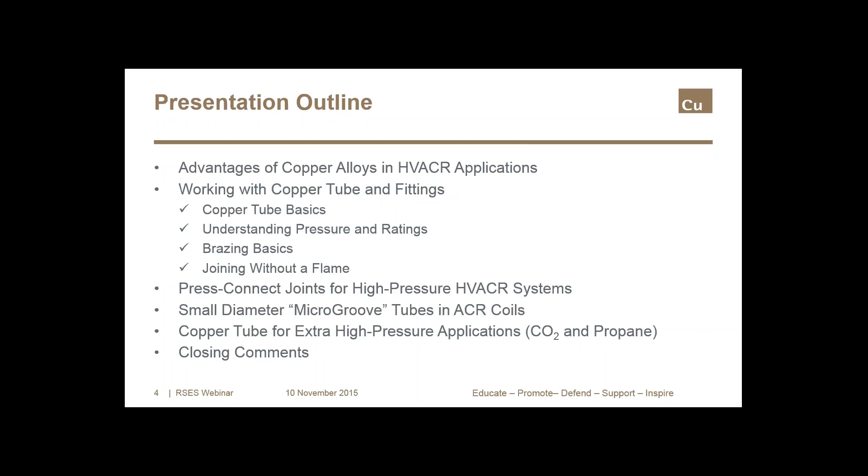Copper alloys have been used in heat transfer applications for well over 100 years, and the reasons behind that long and successful history are things that field service engineers see firsthand all the time. Even in the highly competitive world we live in today, copper still represents a very economical solution because it's so easy to work with.

Because it can be formed and joined in a short period of time, installations are fast, efficient, and effective. Copper components are reliable and callbacks are rare. In the field, the excellent workability of copper products allows for fast, strong, leak-free joints. In areas where the use of a flame is prohibited, there are effective joining methods that do not require a torch. And in stark contrast to other materials, copper components can be repaired in the field easily.

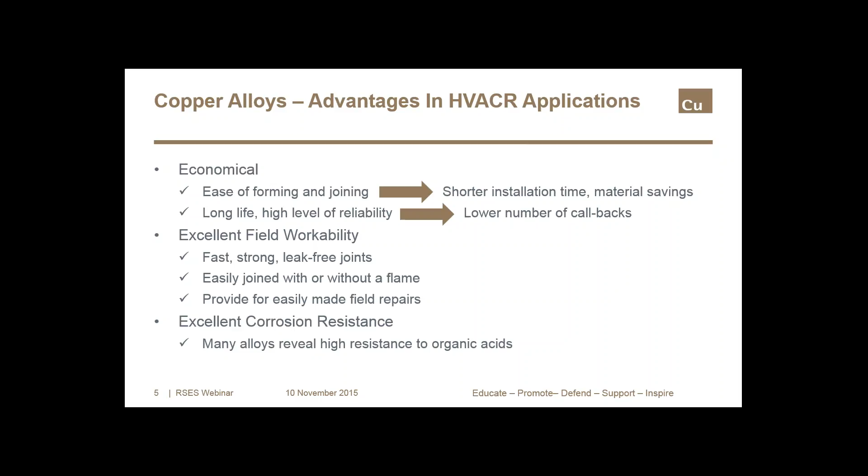Copper alloys are inherently resistant to corrosion. Certain alloys are resistant to the presence of organic acids, and copper tubes made from these alloys are specifically being marketed for air conditioning and refrigeration applications, such as evaporator coils.

The thermal conductivity of copper is more than 60% higher than aluminum and about 30 times that of stainless steel. Copper alloys are also quite strong. Because of this high strength, copper tubes are able to handle high pressures with relatively thin walls compared to other materials. We'll talk more about new refrigerants and higher operating pressures, but the strength of copper alloys is one of the qualities proving to be important to a future of more environmentally friendly refrigerants.

Because copper tube can be formed to follow the contour of structures and corners, the number of joints and elbows can be minimized, and that results in a savings of material and time.

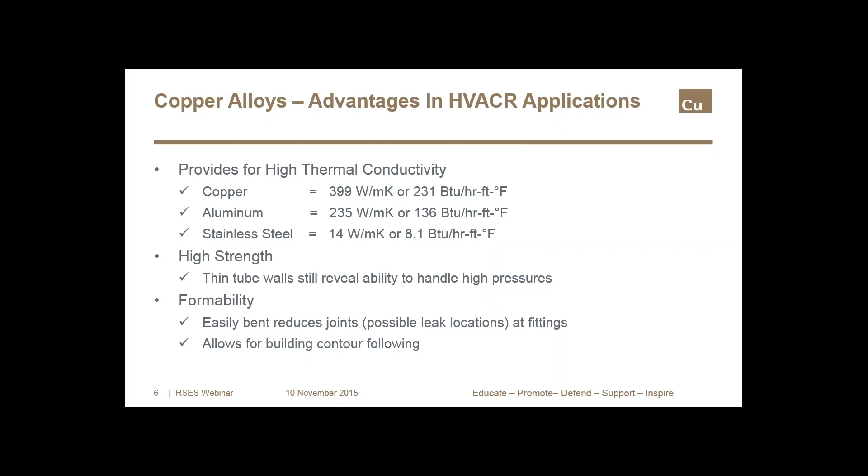Copper is safe. It does not burn, and it will not carry fire through walls, floors, and ceilings. There are no volatile compounds needed for installation. It doesn't degrade into toxic compounds, and there are effective joining methods that do not require a flame, even for high-pressure applications.

Copper tube and fittings are manufactured to well-defined standards and marked with permanent identification, so you know exactly what it is and who made it. It's accepted by virtually every major mechanical code.

Finally, no copper used in a building today should ever end up in a landfill. Copper stands alone as an engineering material that can be recycled over and over without degrading its content or properties. So once again, there are good reasons why copper has been used in heat transfer for over 100 years.

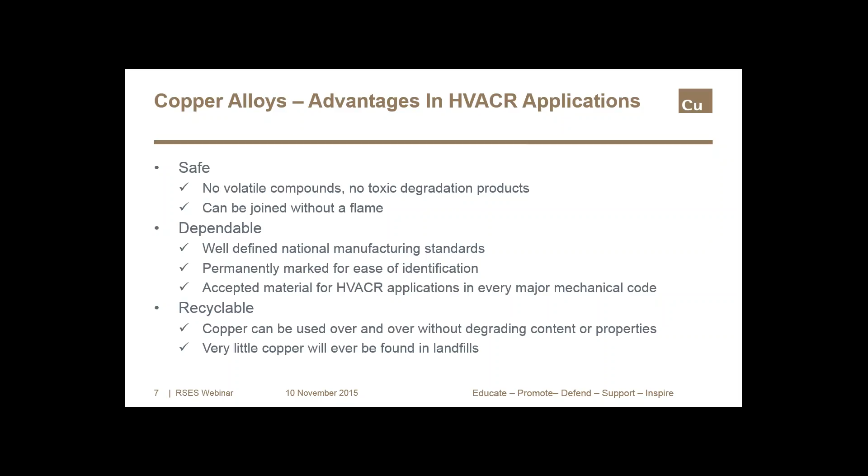Copper tube and fittings for air conditioning and refrigeration applications are made from nearly pure copper. It's an alloy we refer to as C122, and it has over 99.9% copper with very small amounts of phosphorus.

Copper tube is available in coils or in straight lengths. If you're working with a coil, it's annealed or soft drawn. But if you're working with straight lengths, it could be annealed or drawn. A drawn tube means it was once at a larger diameter, and through a drawing process that involves a die, the final diameter was reached. This means the copper was cold worked, resulting in a harder material.

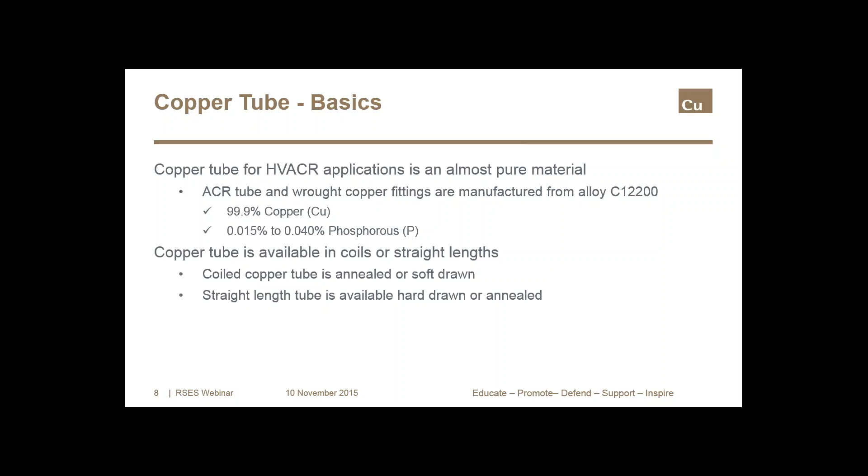Annealed tube means the material has undergone a heating process that resulted in a soft temper. This tube is more pliable and easy to form. Strength, formability, and other mechanical factors determine the type of copper tube that will be used in a particular application.

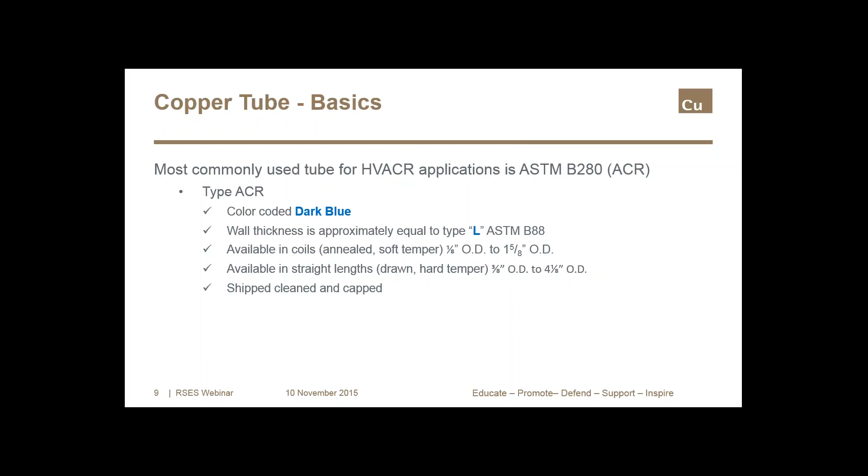For air conditioning and refrigeration, type ACR tube is most common. It meets ASTM specification B280. It is color-coded blue and has a wall thickness that's most like type L B88 tube. Coiled or annealed tube is available in diameters from 1/8 of an inch up to 1 5/8 inches OD. In straight lengths, drawn tube or hard temper is available in diameters from 3/8 all the way to 4 1/8 inches OD.

Copper tube can be plastic coated for what we call aggressive or corrosive environments. The tube can also be insulated or even pre-charged.

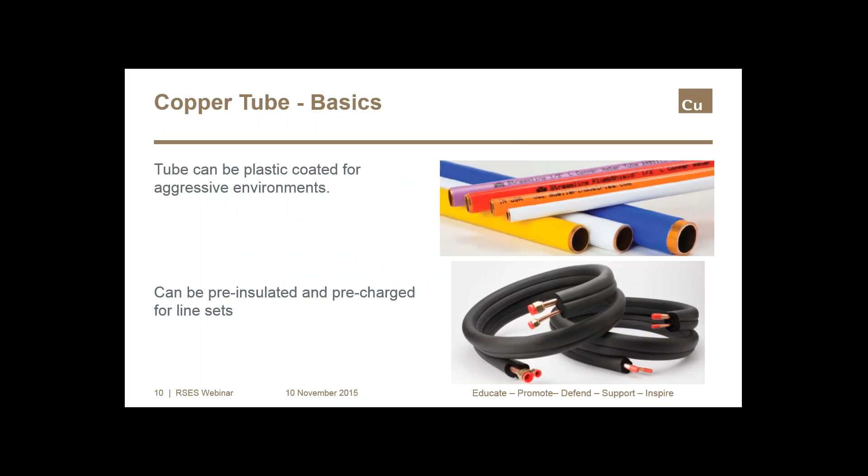An experienced technician that's been on the job for a while has no doubt noticed an evolution in refrigerants, and the trend with new refrigerants is higher operating pressures. About 25 years ago, government regulations became a factor in the design of air conditioning and refrigeration equipment when the Montreal Protocol took effect. The Montreal Protocol mandated a phase-out plan for CFCs, chlorofluorocarbon refrigerants. This covered refrigerants like R12 that are no longer used.

HCFC refrigerants, or hydrochlorofluorocarbons, were allowed as transitional replacements until HFC refrigerants were fully implemented. HFC stands for hydrofluorocarbon, and this family of refrigerants does not have chlorine, which was the problem element linked to the depletion of the ozone layer. So R22 was a transitional HCFC refrigerant, and today we see this being replaced by HFCs like 134A, 404A, 410A, and a whole host of others.

It's typical for HFC refrigerants to operate at higher pressures. Looking forward, we see a push for natural refrigerants such as R744, which is CO2, and R290, which is propane. And refrigerant systems that use CO2 have yet even higher operating pressures.

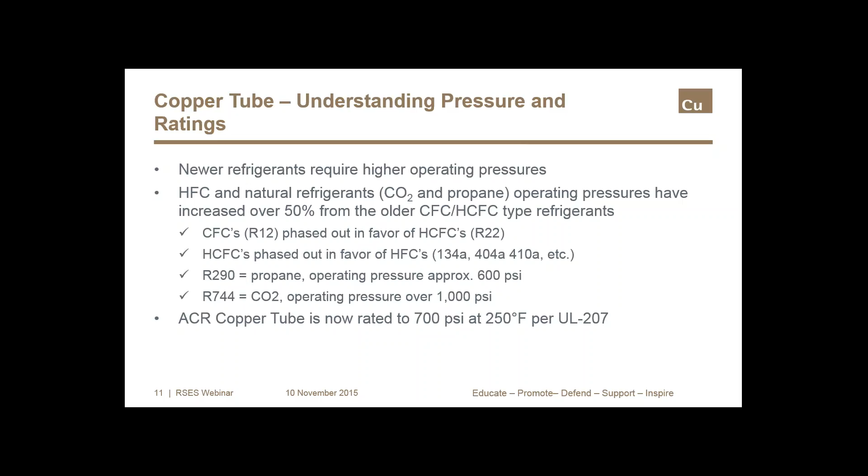Copper tubes and fittings are well suited for new refrigerants with higher operating pressures. ACR tube is rated to 700 psi at 250 degrees Fahrenheit, and this is certified by UL 207. But manufacturers are actively promoting new products for high pressures, and we'll talk a little bit later about copper tube for extra high pressure applications.

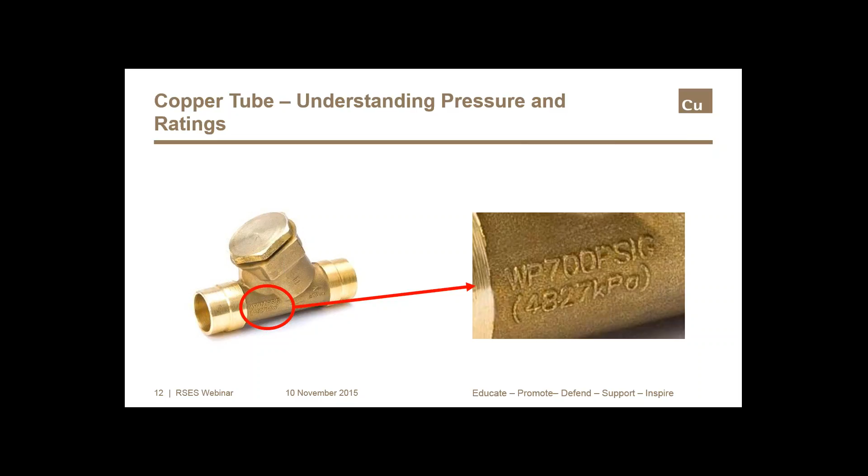When I spoke about the dependability of copper products, I mentioned that copper tube and fittings are manufactured to well-defined standards and marked with permanent identification, so you know exactly what it is and who made it. Here's an example: we can see that this fitting is manufactured for working pressures up to 700 psi. And here's another example of cast copper alloy pressure ratings and manufacturer's identification.

Wrought copper fittings look exactly like copper tube, and are preferred for air conditioning and refrigeration brazing. They're available over a wide range of sizes and types.

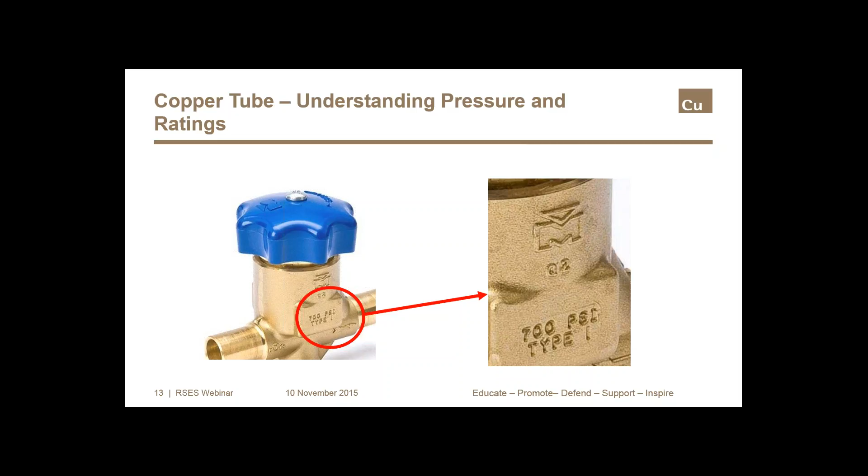The exceptional formability of copper gives us the ability to form it at the job site. When tube is bent correctly, it will not collapse on the outside of the bend, and it will not buckle on the inside of the bend either.

We've learned from burst testing that the strength of a bent copper tube can actually be greater than it was before bending. Both annealed tube and drawn tube can be bent with benders. The proper size bender must be used for each size tube.

First, with the handles at 180 degrees and the tube holding clip raised out of the way, the tube is inserted in the groove of the forming wheel. Next, the tube holding clip is moved over the tube and the handle is positioned at a right angle. This engages the forming shoe over the tube.

At this point, the zero mark on the forming wheel should be even with the front edge of the forming shoe. The bend is made by pulling the handles toward each other in a smooth, continuous motion. The calibrations on the forming wheel show the angle of the bend.

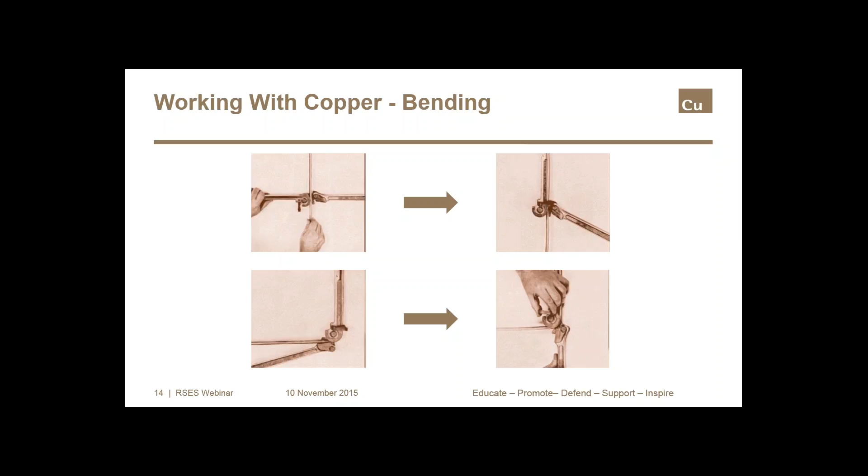We're going to turn our attention now to joining methods, and we're going to start with brazing. Brazing is most common in air conditioning and refrigeration applications, and that's for good reasons: it's a fast process, and it makes a strong, leak-free joint. Compared to solder, brazing is done at much higher temperatures.

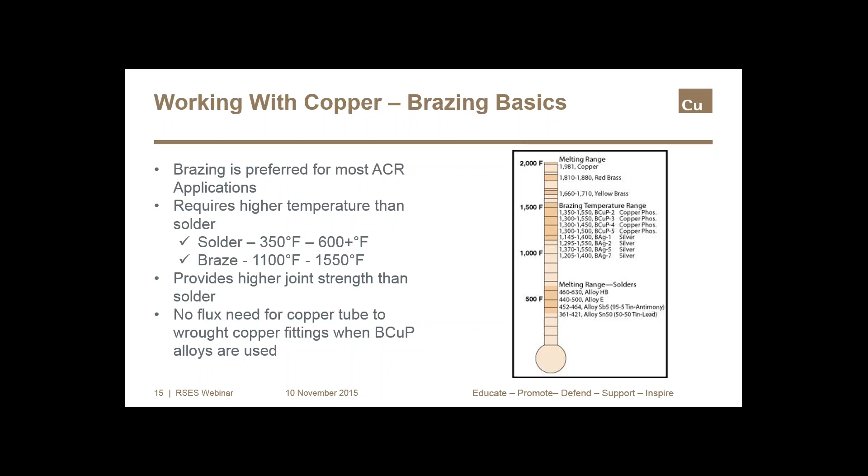Brazing requires filler metals and capillary fittings. When brazing copper tube to wrought copper fittings, it does not require flux because the phosphorus in the filler metal does that job. However, when other metals are brazed, fluxes are typically required, and it's critical that the correct flux is used.

Looking at filler metals, there are two basic types normally used in air conditioning and refrigeration applications: a brazing copper phosphorus, or BCuP series, and a brazing silver, or BAg series. The BCuP series is most commonly used for air conditioning and refrigeration installations, and these filler metals have higher melting temperatures than the silver-containing BAg series.

There's a BCuP-2 filler that's recommended for close tolerances. There's BCuP-3, 4, and 5 that are recommended for joints where close tolerances cannot be held. Looking at the composition of BCuP filler alloys, there's phosphorus in amounts that vary from about 4 to 7.5%. The phosphorus in this alloy acts as a fluxing agent.

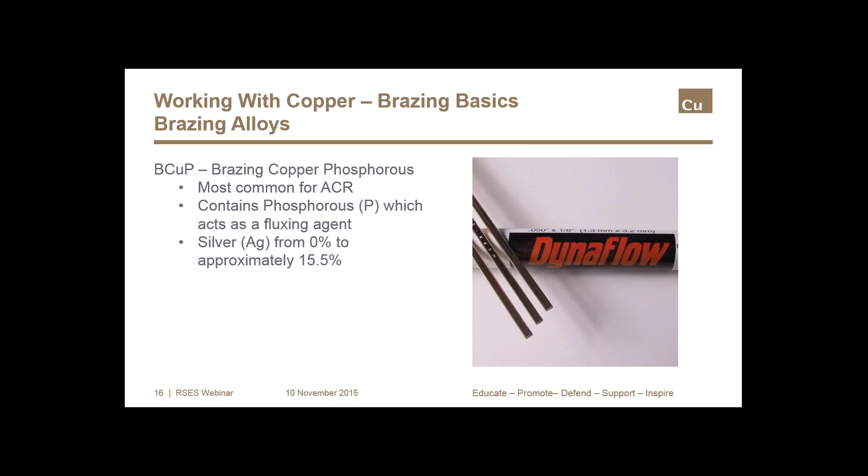So, when joining copper to copper using a BCuP brazed filler, there is no need for a separate fluxing operation.

The filler metals that contain silver, the BAg series, are used to join dissimilar metals. These brazed fillers can contain a considerable amount of silver, making them rather expensive in comparison to the BCuP fillers. Note that the BAg fillers do not contain phosphorus or any other metal that would act as a fluxing agent. Therefore, a separate fluxing operation is required when you're working with BAg brazed fillers.

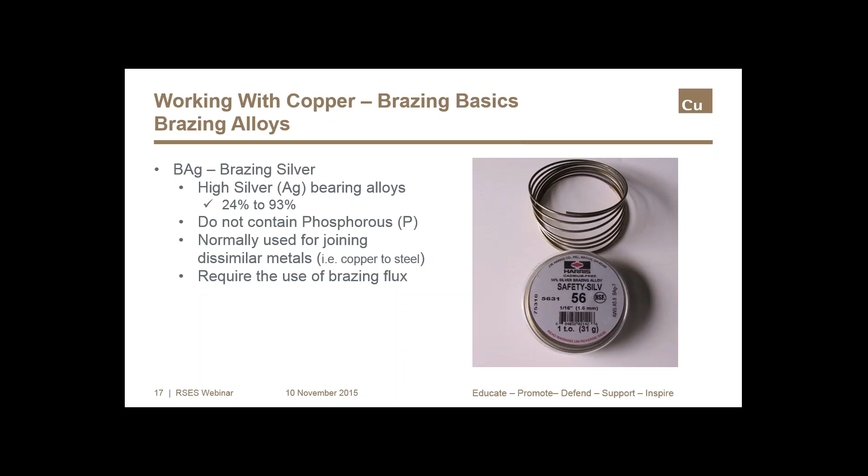The American Welding Society, or AWS, has developed what they call the 3T rule. It says that if the brazed alloy can penetrate the joint a distance of 3 times the thickness of the thinnest material, which is most often the tube, then the finished brazed joint will be stronger than the tube or the fitting. So the message from AWS is to shoot for deep penetration of the brazed alloy, and the technique used to heat the joint during brazing will be an important factor in achieving that penetration.

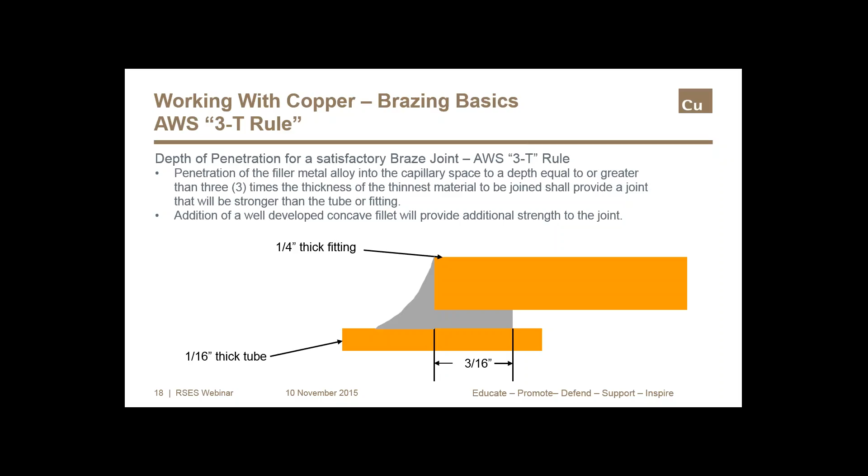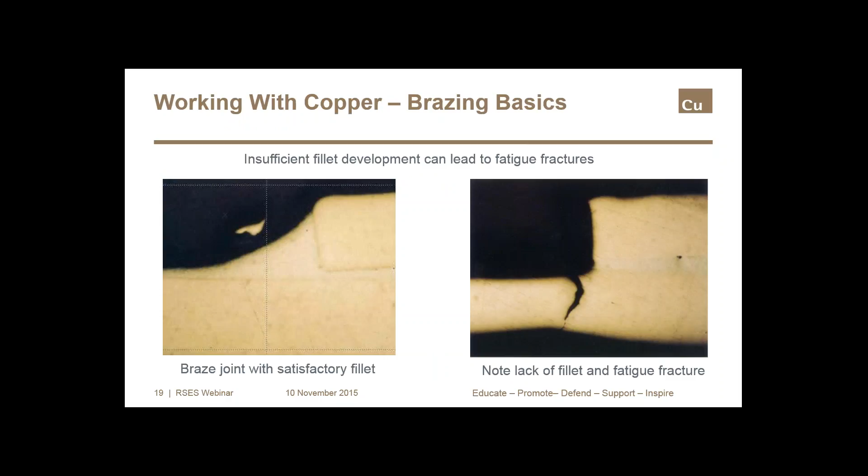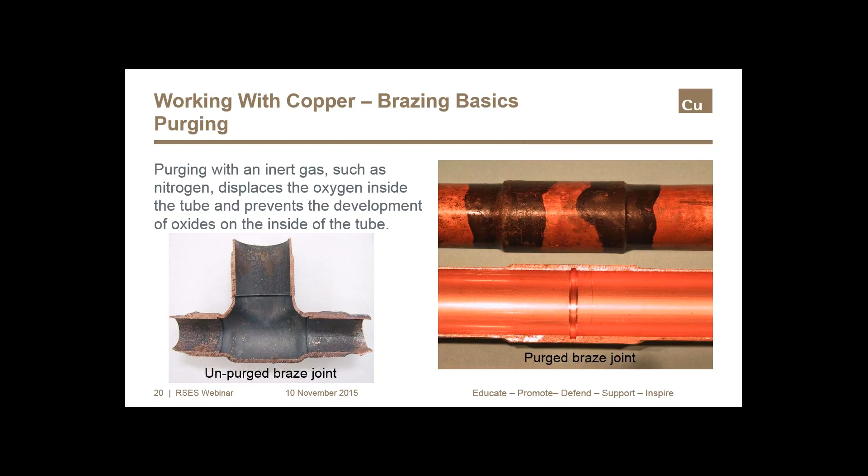It's highly recommended for air conditioning and refrigeration installations that the tube be purged with an inert gas during the brazing process. Nitrogen is typically used as the purge gas, and it displaces oxygen from the interior of the system while it's being subjected to the high temperatures of brazing. This eliminates the possibility of forming oxides on the inside surface of the tube. It makes a noticeable difference, as we can see in the cross sections on the slide.

Here are 6 installation steps that will ensure an effective brazed joint: measure, cut, ream, clean, flux, and heat. All of these steps are important. The tube must fit all the way into the base of the fitting cup, so measuring the tube is critical. The tube must be cut so it's perpendicular to the tube run, and then any burrs must be removed.

Dirt, oil, and oxides that form on the surface of all metals will interfere with the flow of molten brazed alloy, and this flow of alloy is absolutely essential to the quality of the finished brazed joint. Oxides must be removed from the outside of the tube and the inside of the fitting. If flux is required, it's applied to the clean tube and fittings before the assembly is heated to braze temperature.

When the joint is assembled, the tube should be inserted hard against the stop of the socket. It's also important to support the assembly while it's being brazed, which will keep the joint in proper alignment. So we'll look at heating next.

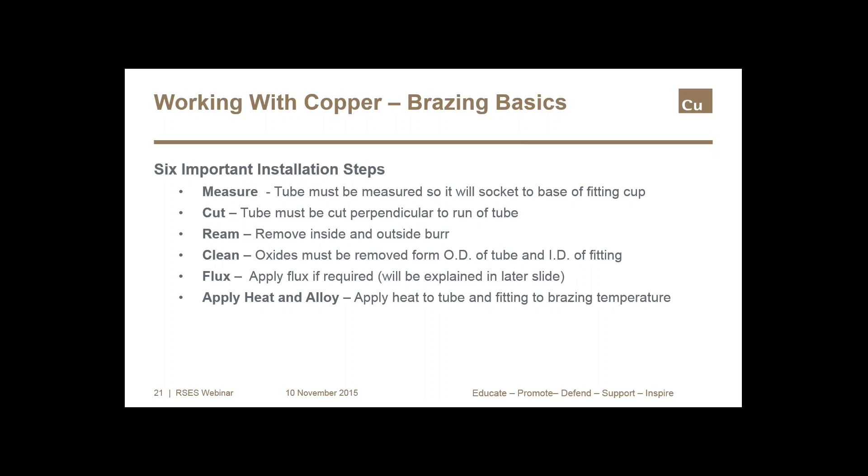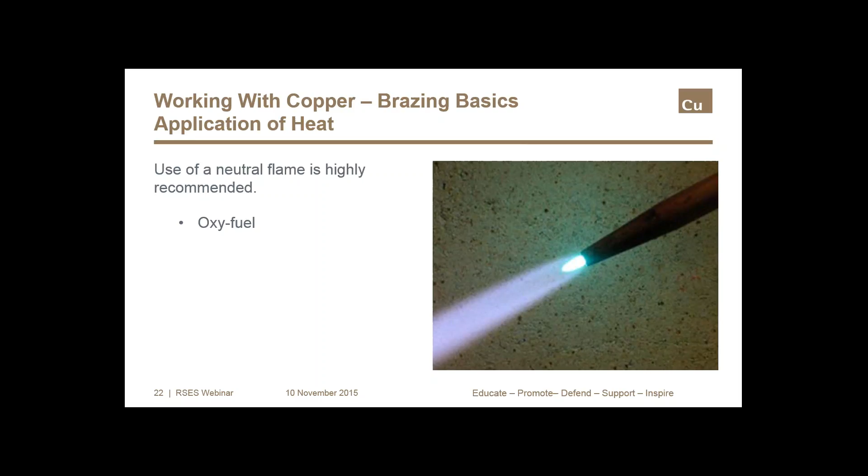Excessive oxygen is also a problem, and this flame is referred to as an oxidizing flame. Needless to say, an oxidizing flame should not be used for brazing. Air fuel is sometimes used on smaller joints. Remember, again, to use a neutral flame.

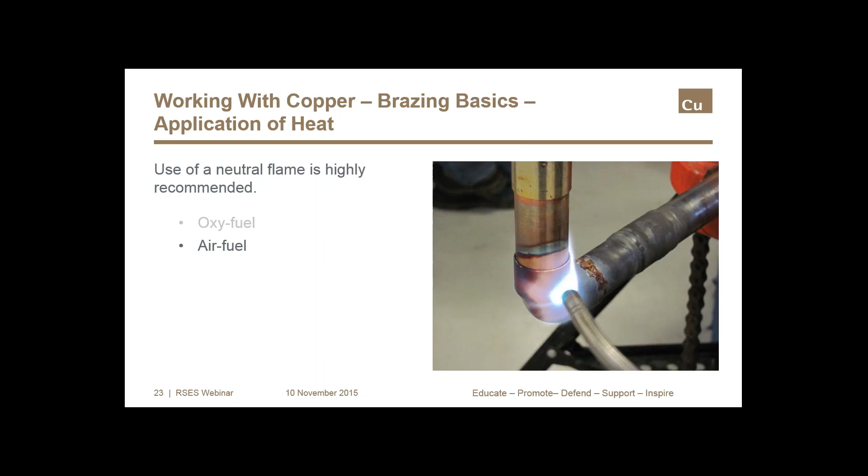The tube should be heated first, beginning about 1 inch from the edge of the fitting and sweeping the flame across the tube in short strokes. The flame should be at right angles to the tube. It's really important that the flame be in motion and not remain on any one point for too long. Even though copper melts at high temperatures, nearly twice the melting point of aluminum, for example, too much heat in one spot for too long can be enough to damage the tube.

So after heating the tube, switch the flame to the fitting at the base of the cup. Sweep the flame from the fitting to the tube to get uniform heating. As the fitting comes up to temperature, start sweeping the flame back and forth along the axis of the joint to maintain heat in all the parts to be joined. Remember to keep the flame moving to avoid damaging the tube or the fitting. If cast fittings are used, exercise caution to avoid excessive heating that might crack the fitting.

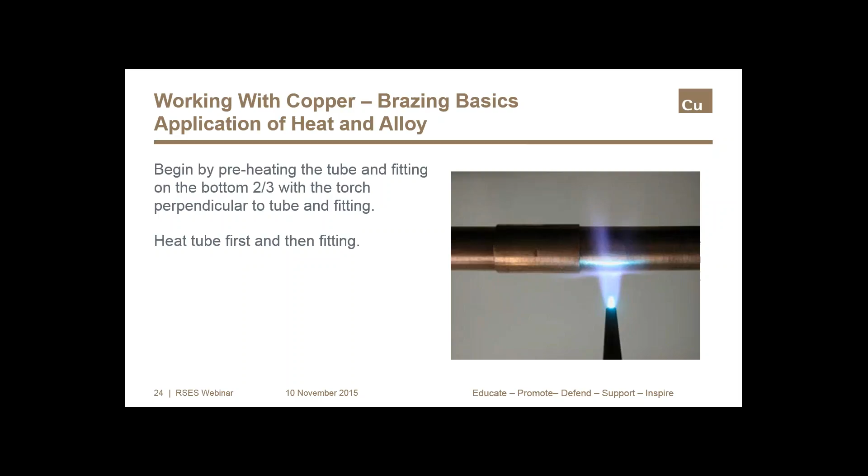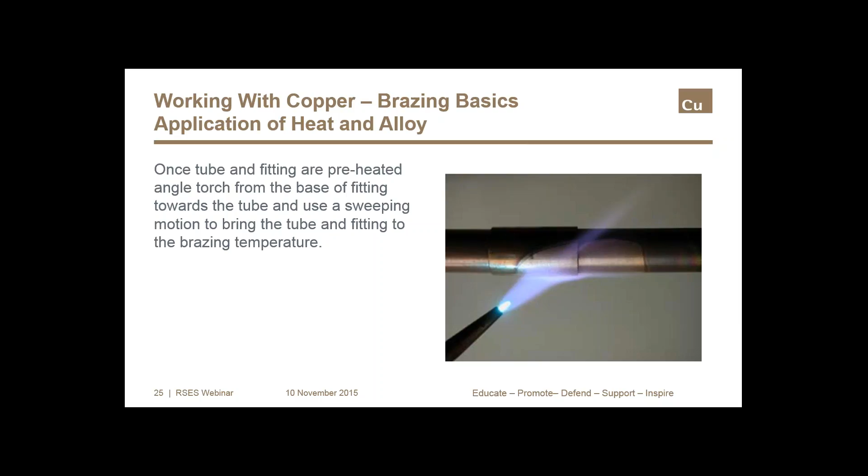When the tube and fitting assembly has reached the braze temperature, the flame should be angled toward the tube, and now this assembly is ready for braze alloy. So we now have the joint heated and the flame at the base of the fitting angled toward the tube. The filler metal is added at the bottom where the tube enters the socket of the fitting.

Heat and capillary action will draw molten alloy into the joint from bottom to top. It's a good idea to keep the flame away from the filler metal itself as it's fed into the joint. The temperature of the tube and fitting at the joint should be high enough to melt the filler metal. As the filler metal is drawn into the joint, we want to keep both the fitting and tube heated by moving the flame back and forth from one to the other.

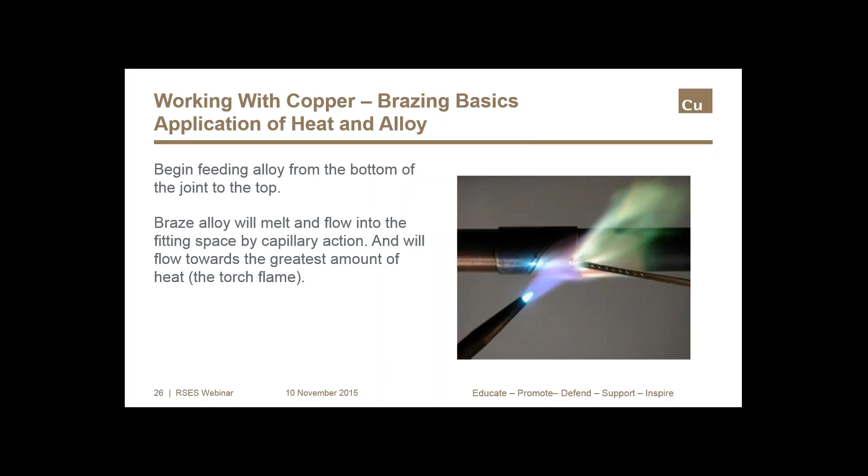The heating procedure we just reviewed is a proven method, but technicians often develop their own best practices. Do keep the 3T rule in mind and be aware of the problems that can develop from poor brazing. Remember that the continuous fillet of filler metal should be visible completely around the joint, and this fillet is key to an effective and durable braze connection.

There's a couple of ways to make joints without using a flame. One way is to create an electromagnetic field around the area to be brazed. The inductive energy heats up the metals, resulting in a brazed joint just like we've been looking at, and except for the flame heating techniques, all the guidelines we just discussed apply. In these photos, we see induction brazing being done both on a joint in the field and in the coil manufacturing process on a return bend.

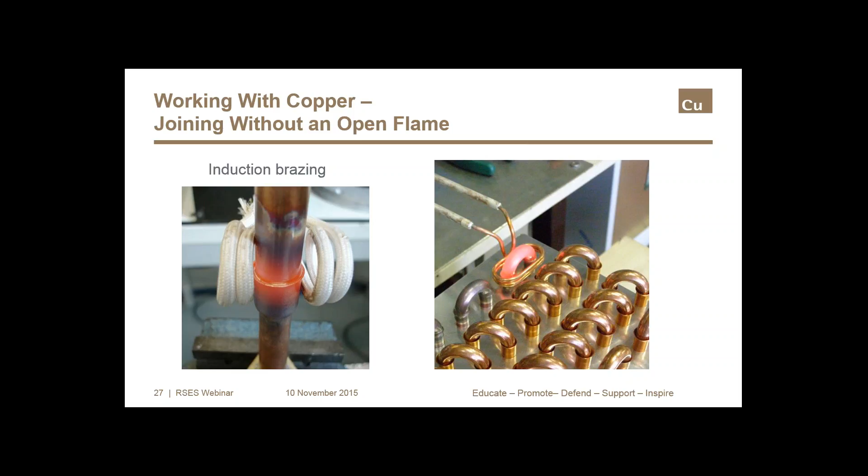Another way to join tubes without using a flame is press connect joints. This is an area where new advancements in technology, specifically in O-ring materials and tools, has led to press connect joints for high pressure applications like air conditioning and refrigeration. Referring to the new refrigerants and higher operating pressures, there seems to be a heightened interest lately in press connect joints.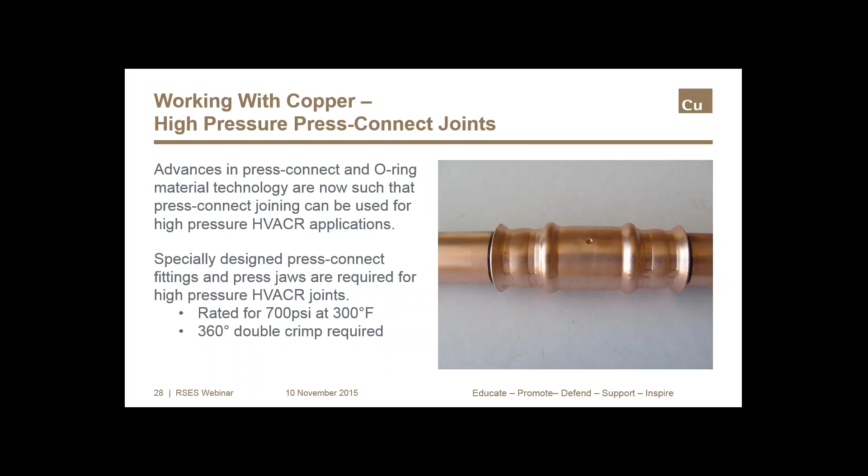As with any air conditioning or refrigeration system, cleanliness is important. The preparation procedure for press connect joints includes removing burrs and chamfering the cut end of the tubes. Make sure that the gasket is in place inside the fitting, and be sure to mark the insertion depth on the tube.

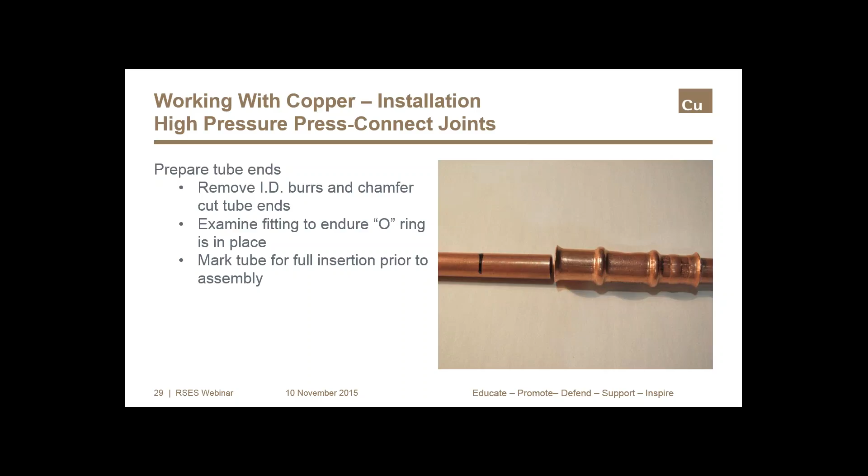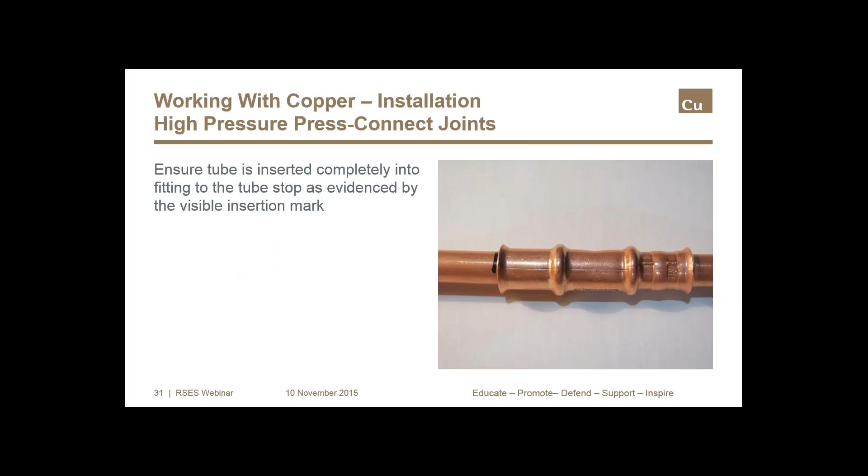Proper sized jaws must be used for the diameter of the tube that you're working with. The tube must be inserted completely into the fitting, and this is where the insertion mark on the tube will provide an easy check that the tube is, in fact, inserted completely.

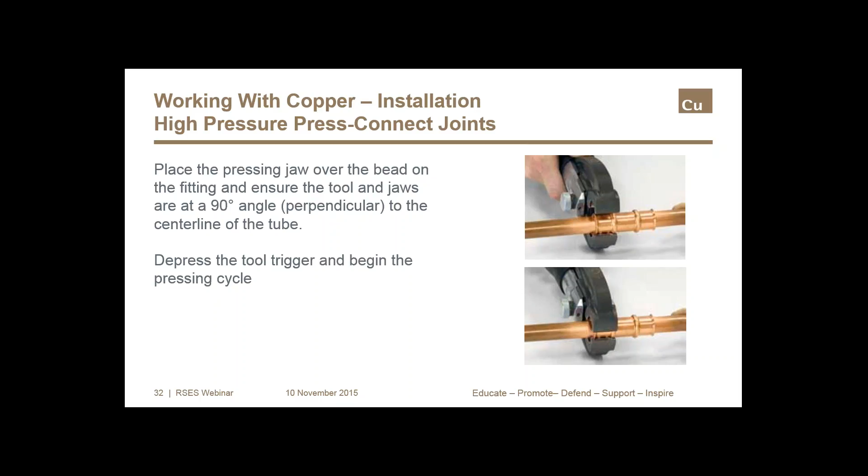The next steps are to properly place the pressing jaws on the fitting and start the pressing cycle. The pressing jaw should be centered on the tube and placed over the bead on the fitting. A trigger starts the pressing cycle.

It's important when the pressing is complete to make sure the tube has remained fully inserted. Again, the insertion mark that we put on the tube at the beginning of the process will tell us that the tube stayed where it belongs.

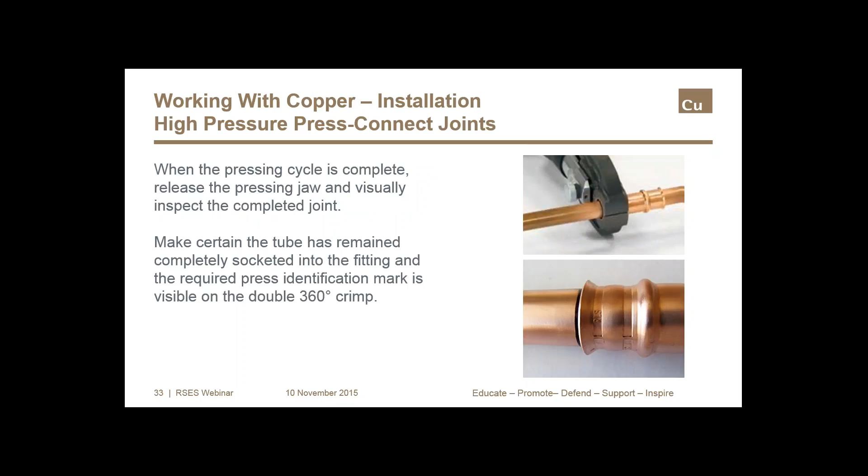A go, no-go gauge can check the press connect joints to verify that they were all completed correctly. The go, no-go gauge is always included in the press connect kit, and it has gauges for various tube diameters. When a joint is uncrimped or crimped incorrectly, it will show up on the gauge as we see in the photo on the right. In the photo at the bottom, we see a correctly crimped joint verified by the gauge.

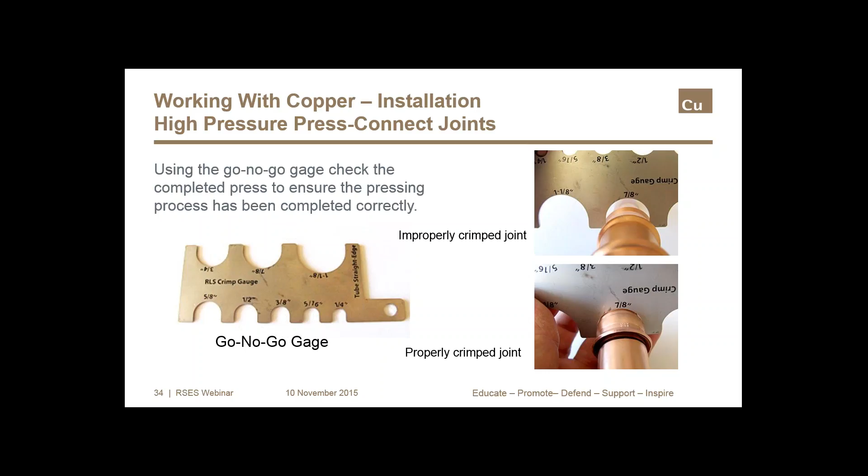To summarize this discussion on press connect joints, this process has two primary advantages over brazing: no flames or need for purging, and shorter installation times. As fast as brazing is, press connect joints can often be done faster. The time savings increases with larger size tubes and fittings.

A third-party comparison of on-site brazing to press connect joints has shown the installation time for press connect to be lower by some 31% for quarter-inch size fittings and 77% for 1 1/8 inch fittings. So again, the advantage for press connect increases with the size of the fittings. Press connect joints are approved for a large number of refrigerants, and as the technology continues to improve, we expect the list of approved refrigerants to grow as well.

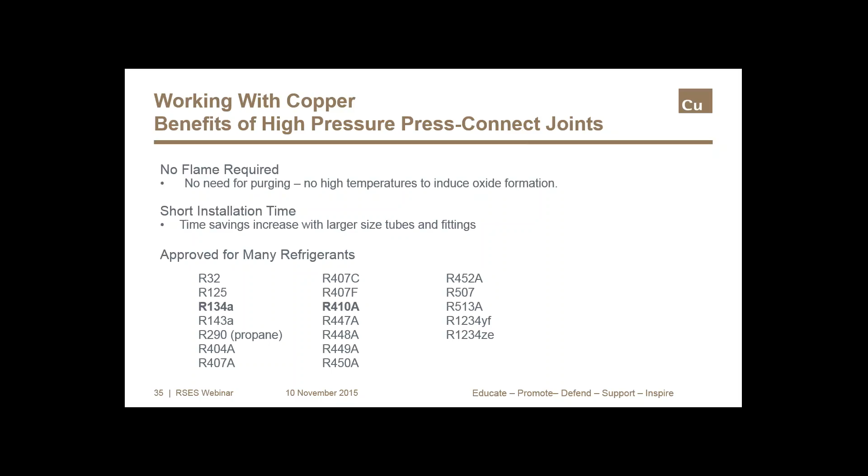So we're going to switch gears now and take a look at a new trend in air conditioning and refrigeration coils. When installing coils in the field, you may have noticed a trend toward lighter coils with smaller diameter tubes, and this is a result of the industry focus on energy efficiency. Engineers that design coils have found significant gains in heat transfer by using smaller diameter tubes, and there's an economic advantage to this too.

Smaller tubes also mean less material, and less material means lower cost. Although it will take a larger quantity of small diameter tubes to move a particular amount of refrigerant, smaller diameter tubes can handle that pressure with thinner tube walls. It's surprising what a difference small diameter tubes can make in the amount of material and even the overall size of the coil. Many coils have been redesigned from using 3/8 inch or 9.5 millimeter tubes down to just 1/4 inch or even smaller diameters such as 5 millimeters.

The copper industry gave this trend towards small diameter tubes the name microgroove. Micro refers to small diameters, and groove refers to the enhancements on the inside of the tube that help improve heat transfer rate.

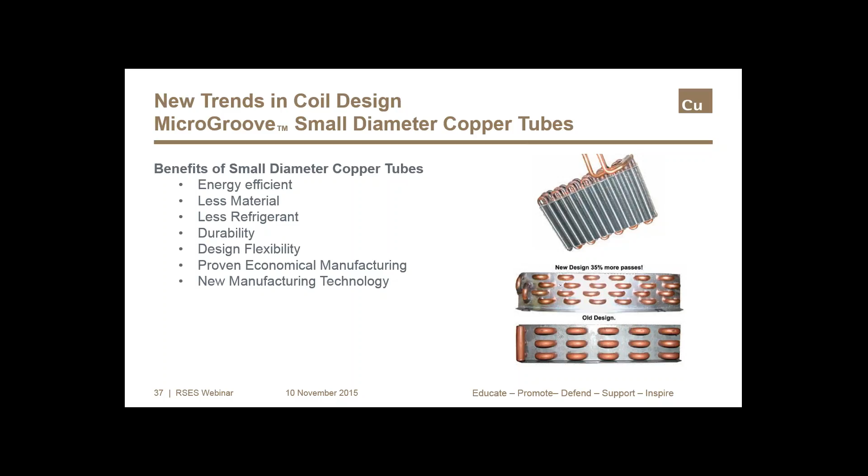Whenever fluid moves through a tube, the fluid closest to the tube wall behaves differently than the fluid in the center of the tube. The fluid right next to the tube wall sets up a boundary layer where heat transfer becomes more difficult. This applies to the hydraulic motion of fluid as well as the way heat moves from the center of the tube to the tube wall. So heat transfer engineers talk about both hydraulic and thermal boundary layers.

To simplify this a bit, fluid closest to the tubes tends to move slower than the fluid in the center. Even in turbulent flow, a laminar sublayer forms, and heat moves slower through these boundary layers than it does in the faster moving fluid toward the center of the tube. Boundary layers act as an insulator and they interfere with the heat transfer that we want.

Now the internal enhancements in microgroove tubes—the grooves and patterns that tube manufacturers put on the inside tube wall—reduce this boundary layer and increase heat transfer through the tube wall. You can see the boundary layer in a smooth tube develop, and it does not dissipate or go away. But in a tube with microgroove enhancements, the boundary breaks down as it moves over the grooves.

Then there's additional mixing of refrigerant that occurs inside the tube because of these grooves, and that also increases the amount of refrigerant that comes in contact with the tube wall. All of this improves the transfer of heat through the tube wall.

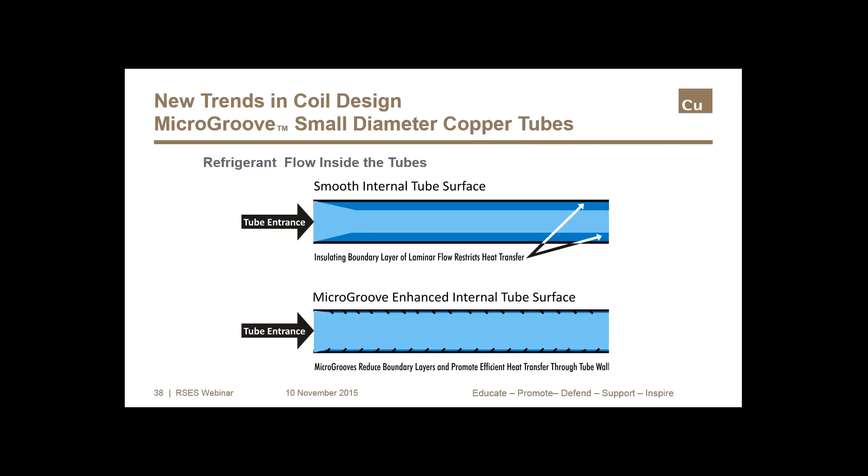Airflow goes around the tubes as it passes through a coil, and as it does, the airstream is broken up and heat is transferred into the air. The number of tubes and the location of the tubes has an impact on heat transfer. It also has an impact on the air pressure as it's lost going through the coil.

Air forms the same type of boundary layers as refrigerant does, and in many respects air can be dealt with the same as any fluid. Just as we saw with microgrooves inside of the tubes, outside the tubes break up any boundary layers that the air tends to form as it flows through the coil.

The more tubes we use, the more we break up the boundary layer on the air side, and the more heat transfer we'll get. But in many cases, more tubes also means a higher air side pressure drop. So there's a balance at some point where a coil uses an optimal amount of air to achieve the heat transfer that the system requires.

Remember also that heat's being dissipated by the fins, and the fins have slots or louvers, again to break up boundary layers and improve heat transfer.

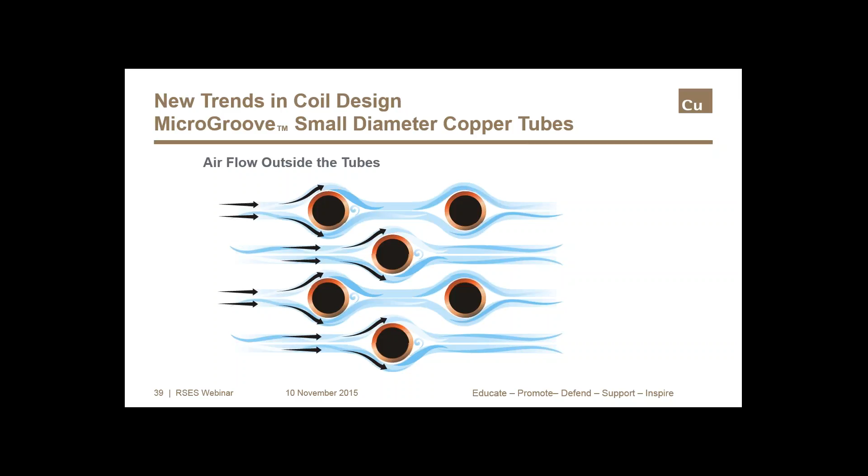When round copper tube flat fin coils are manufactured, the tubes are expanded. This fastens the tubes to the fins and also makes sure there's sufficient contact to ensure the transfer of heat from inside the tubes into the fins and finally into the air. This has been a mechanical process for many years.

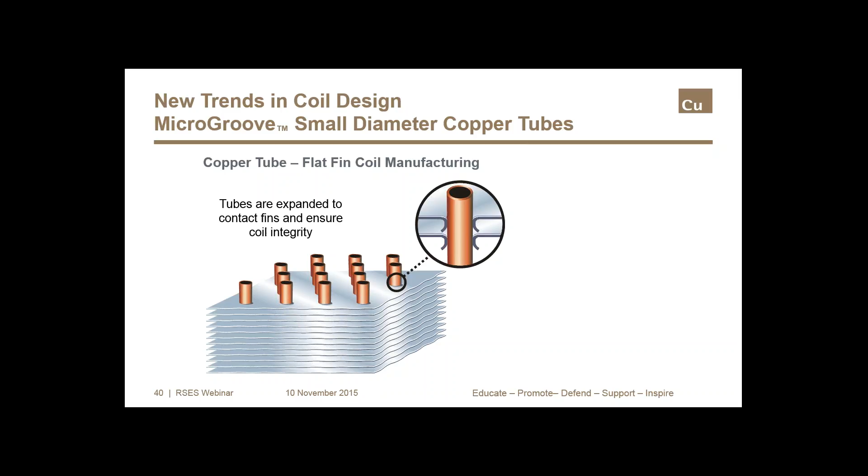A rod, or what's referred to as a bullet, is physically forced through the tube. The bullet is a bit larger in diameter than the tube, and the expansion of about 10% or so does the job. With a trend towards smaller diameter tubes, this process has certainly been doable, but it's become a more delicate and slightly longer process than it is for larger diameter tubes. Very recently, a major equipment manufacturer that builds coil manufacturing systems for most of the world's coil suppliers has introduced a new pressure expansion process.

You can see that the conventional mechanical expander requires significant vertical height as well as floor space. The new pressure expander has a smaller footprint and can produce coils much faster than the mechanical process. And because the pressure expansion of copper is extremely consistent and controllable, this process is especially well suited for copper tube coils.

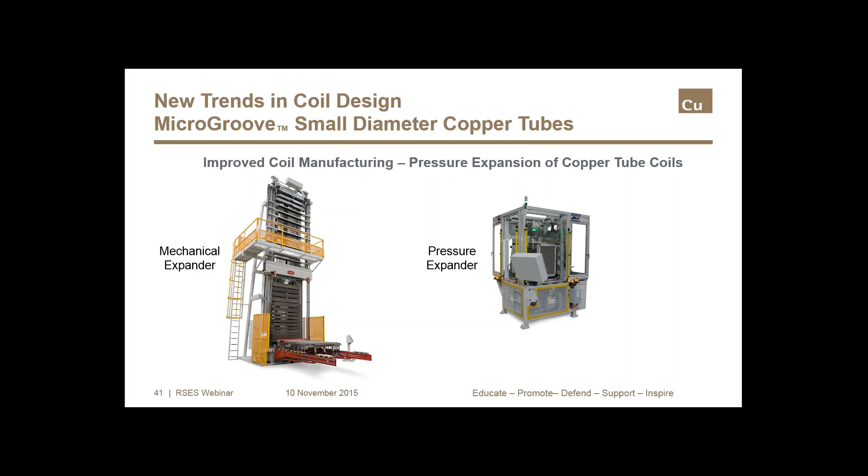This pressure expansion process has been in development for many years, and now that it's introduced, it represents a potentially dramatic shift back to copper tube flat fin coils. For coil manufacturers, this means no more rods or bullets and much faster production times. Faster production times coupled with a huge reduction in scrap rate, that all translates to lower costs for the coil manufacturers. And since there's nothing mechanical touching the inside surface of the tubes, it means that those enhancements inside the tube are untouched and we get their full potential to aid in heat transfer.

For field service professionals, we're expecting to see lower cost coils for both indoor and outdoor units. It also means a consistent, easy-to-repair metal throughout the entire system. As this manufacturing advantage is implemented in the coil building industry and it makes its way to the field, we expect the result will be a new interest in copper tube coils. Definitely something that field service professionals should be aware of.

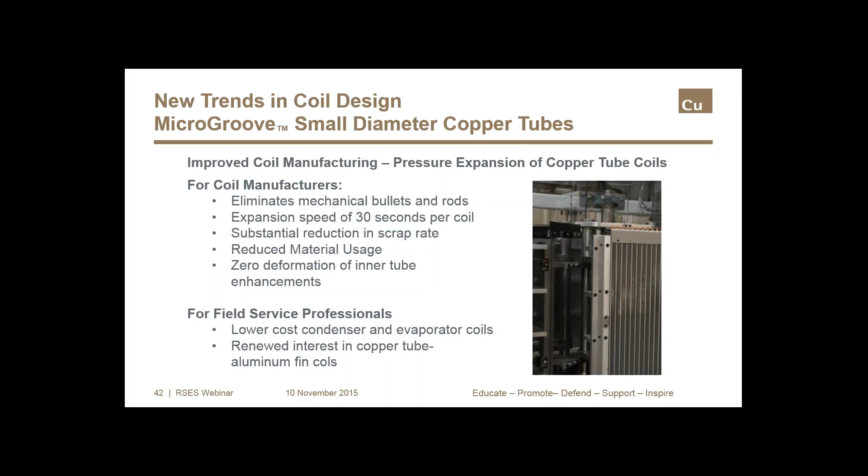So let's turn our attention now to a copper alloy, alloy C194, that's now being used to produce tube for extra high pressure applications. If we look at the composition, that 2.1 to 2.6% of iron in this alloy is really what gives it the strength to handle working pressures of over 1700 psi. And that pressure rating is UL certified.

Also note that the pressure rating does cover brazing and its annealing effect. So if you plan to braze this tube, you don't have to reduce the pressure rating by some 29% like you would for conventional ACR tube.

This alloy has excellent brazing properties, and it allows the exact same brazing process to be used that's used for ACR tube. But specific braze alloys are recommended for this extra high pressure tube. What's important for field service technicians about this extra high pressure tube is that this tube will handle the pressure of a CO2 system. And we know that we'll be seeing more and more green natural refrigerants such as CO2 and propane, as well as other high pressure refrigerant systems.

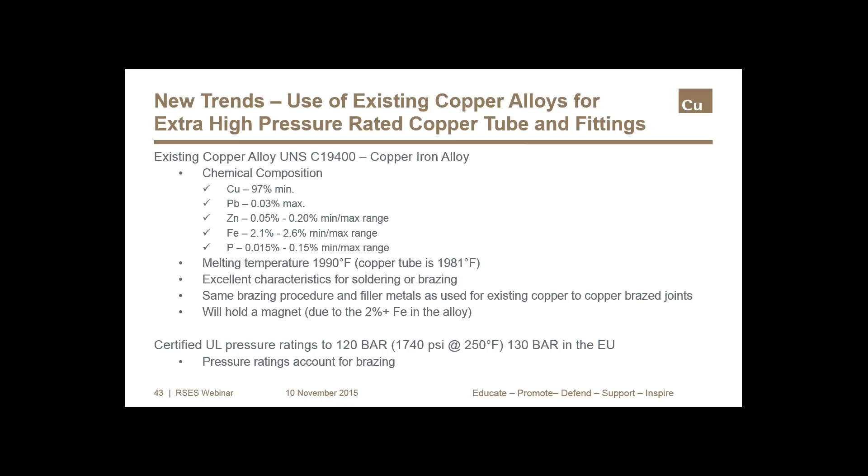So as we conclude, I want to mention how versatile copper really is. There's some 800 different copper alloys that we know of. And throughout history, copper has played a key role in the advancement of our civilization. It always impresses me that as we continue to raise the bar, copper alloys continue to meet the challenge. In the air conditioning and refrigeration industry, copper has traditionally been the material.

And certainly there have been alternatives. But as we move into a future where we focus our attention on efficiency and the environment, it seems that copper is again stepping up to the challenge and delivering new levels of performance. Remember that copper in any heat transfer application is an economical solution. It has excellent workability, and in the field, it can be easily joined and repaired. Copper has excellent corrosion resistance, and those properties are being improved all the time with the use of different alloys.

No other material has the thermal conductivity of copper for the same price. Copper alloys are strong, they're easy to form, and copper is safe. Copper components have a long and successful history, especially in air conditioning and refrigeration. And when it comes to the environment and sustainability, it's hard to match copper being 100% recyclable.